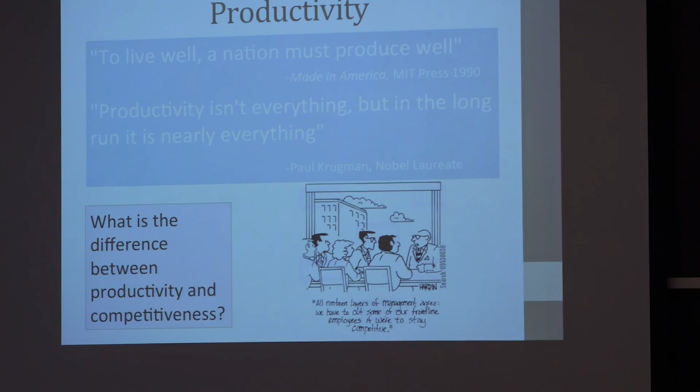So Brian talked about glasses yesterday. Anybody have any questions on that? This was my last slide two days ago, and I kind of brought up this question of what's the difference between productivity and competitiveness. I think I said something about this earlier in the term, but anybody remember what the difference is between productivity and competitiveness?

Basically, productivity is how efficiently can you make something, and competitiveness is what can you sell it for. If I want to give you a sound bite of these things: productivity is how efficient is your process, your people, everything that goes into the manufacturing operation. Competitiveness is all these other nebulous things like the exchange rate between currency, which has nothing to do with manufacturing. That's determined on some geopolitical level, right?

So I was at a meeting once, I was on the review committee for the National Institute of Standards and Technology in their manufacturing area. The first guy in the morning gets up and says, NIST is the Department of Commerce's competitiveness laboratory. He gives this talk, and at the end I ask a question, I say, don't you mean you're their productivity laboratory? Oh no, we're the competitiveness laboratory. I said, so you're dealing with exchange rates? Well, no.

I mean, competitiveness is, do you have slave labor? There's lots of places in the world where we still have slave labor. Whether we call them slaves or whether they're treated like slaves, that's all part of competitiveness. Productivity has to do with how efficient is your manufacturing facility.

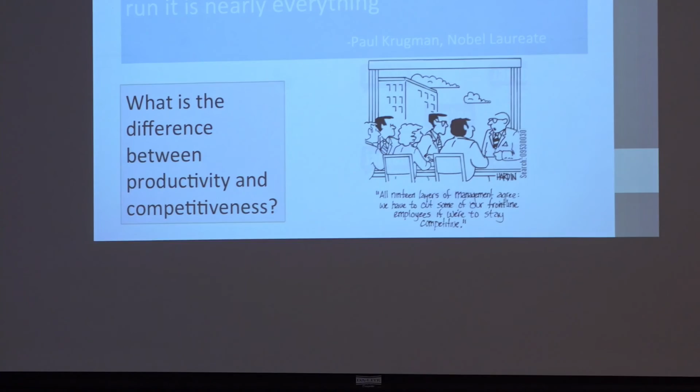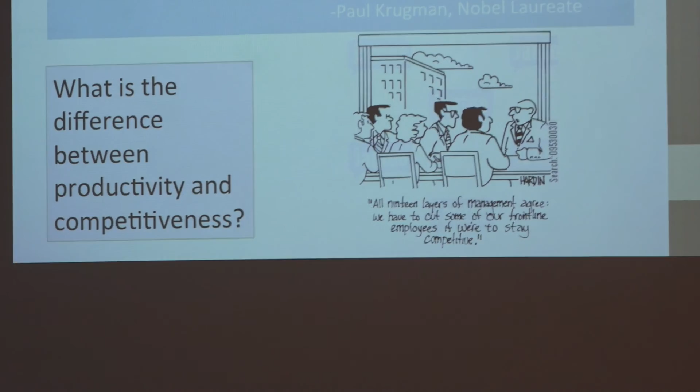And of course, this is a story about how management always thinks that they're the key to productivity. If we have time, I'll tell you this story I heard from a vice president of Pratt & Whitney sometime about manufacturing management during World War II.

But anyway, today I wanted to talk about steel mini mills as a case study of how you can tremendously increase productivity. We kind of walked through and said, well, people were making wrought iron and cast iron 400 years ago. It was a person-year per ton, okay, and that's dropped down to 20 minutes per ton as the person labor input to making steel today.

Some of that was continuous casting, Henry Bessemer melting steel, BOFs and things like that. But another part of this that's been driving it is the steel mini mills. The steel mini mills came about in the mid-1970s because they were actually Canadians, but a couple of people, well, one of them wasn't. The guy who founded Nucor, Ken Iverson, was not a Canadian, he was just a businessman.

But a few people learned that scrap could be had and had been hovering for 30 years around $100 a ton for steel scrap. I mean, it might get down to $90 or up to $120, but it's hovering around $100 a ton. And if you remember, I mentioned the blast furnace hot metal cast iron cost was $180 a ton. They're sort of fungible raw materials, whether you use steel scrap that comes back through recycling, or you take virgin ore and put it through the blast furnace to make cast iron. You can put either one into the steel refining furnaces if you have the right type of furnace, but this one was basically half the cost.

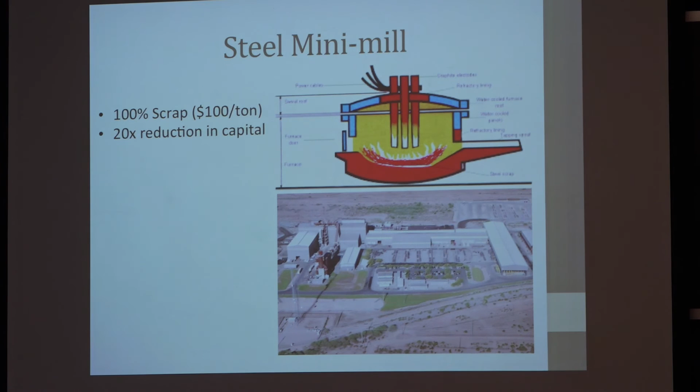Half the cost on something that's 25% of your overall cost in a $500 billion industry could be a lot of money, okay? So these people realized it, and they realized that the only thing that could take 100% scrap was the electric arc furnace. These things have been around since the 1880s, ever since Westinghouse and Edison gave us easy available commercial electricity.

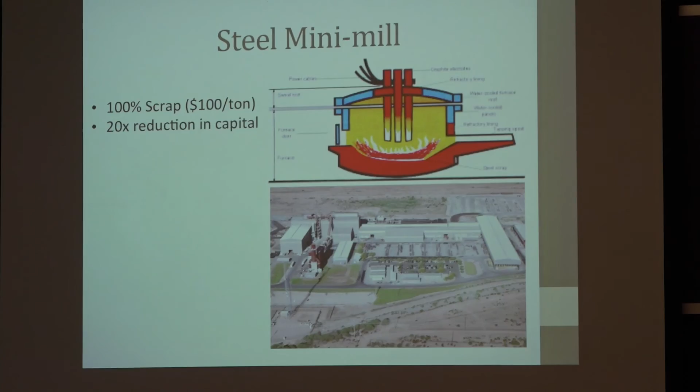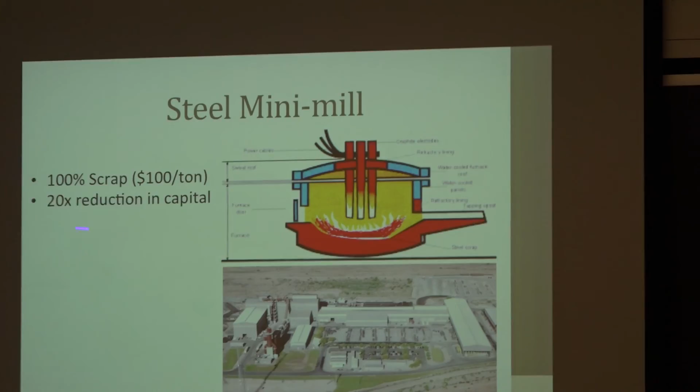They also knew that a couple of these people had worked for big steel companies, and they knew the culture there was to do things the way they'd done it 80 years ago, just wasting money and things like that. So they looked at electric arc furnaces where instead of 300 tons of steel at a time, you could melt 40 or 50 tons at a time, and it might take about 2 hours to melt it when they started, but you'd end up with steel.

And if you used the right type of scrap, that's all you had to do. You didn't have to do all this other refining and other stuff. There were some disadvantages, but they started out saying, we're just going to make rebar, the cheapest value grade of steel. Just a steel bar, doesn't have to have particular impact properties, toughness properties. It's basically a very simple type of material, steel material.

And the big companies, they laughed at them. They said, you guys can't produce more than a couple 100,000 tons of steel a year in your plant, and you're selling the lowest quality stuff. Well, this is the whole story of the innovator's dilemma, which is Clayton Christensen's book at Harvard Business School, about your competition kind of taking a big company and nipping at their toes, the bottom of the product line. The big company's trying to come up with new, fancy, better, high-tech, higher value-added product, and these guys are going after the lowest quality stuff, okay?

But they could do it with a 20-fold reduction in capital. Today, an integrated steel mill would cost you $20 billion, we noted. You can build a mini mill, and if you remember the picture of the Burns Harbor, Indiana plant of Bethlehem Steel, that was stretched for miles, okay? And this is a mini mill, stretches for yards, okay? And that's a 20-fold reduction in capital. And over here is going to be the electric furnace melt shop, whereas this wouldn't be 25% of the melt shop at a big integrated steel mill.

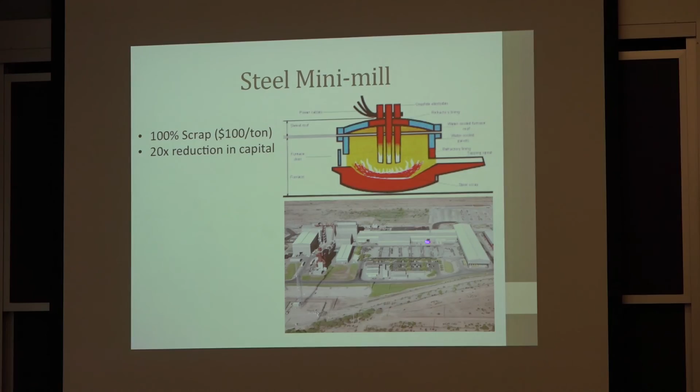And the rolling mills, well, they're only making one kind of product. They're not an integrated mill that's trying to make 100 different products. They're going to focus on one product to begin with. And they don't care. They're just going to take a small piece of the business. And the big guys laughed at them and thought those guys will never go anywhere. That was mid-70s. I was working for an integrated steel producer, and I remember all the jokes that people were making about the mini mills and how they'd never go anywhere.

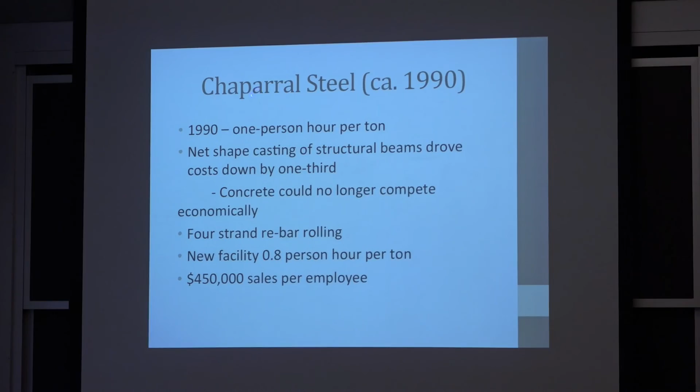Well, it turns out today, about half the steel in the United States is made by mini mills. And it's not just the low-end stuff. They just kept on getting better and better and better. So that's part of the story I want to tell you. And I'm going to take an example of Chaparral Steel. Chaparral's original plant was in Midlothian, Texas, started by a Canadian who's a graduate of this department. They started in the mid-70s, but I'm going to tell you some stories about the 1990s. And they started out with the rebar business.

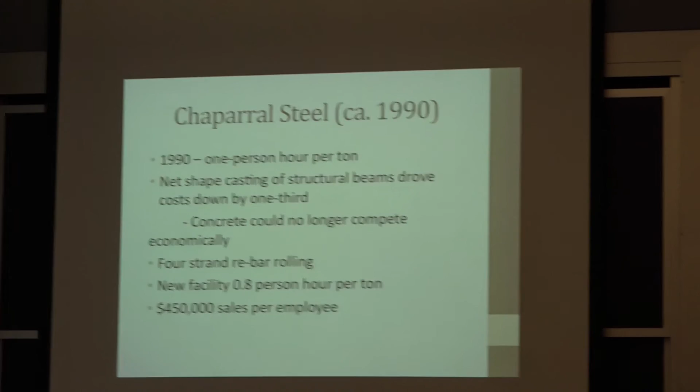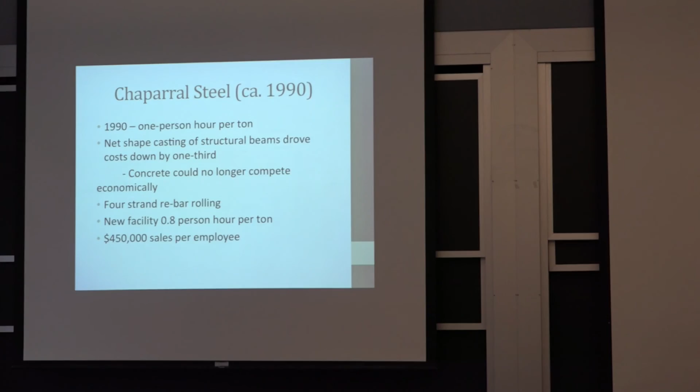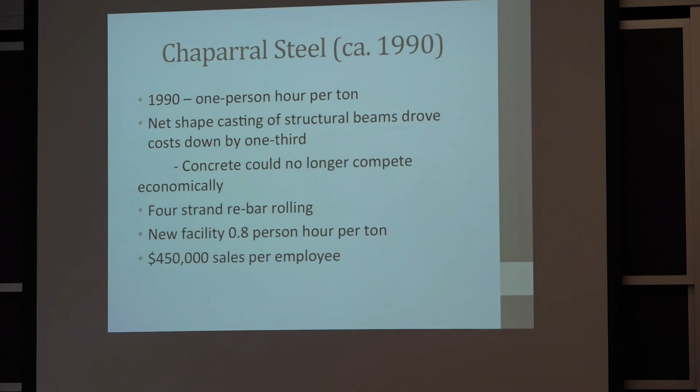I used to go around the country and look at parking garages and say, oh, that one was built about 1980 because it's steel, that one's built in 1970 because it was concrete. That was just the change in economics of this type of technology.

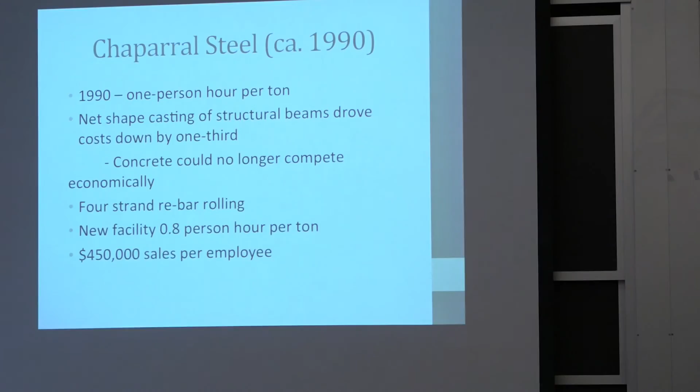Another thing they did was four-strand rebar rolling, which was their earlier product.

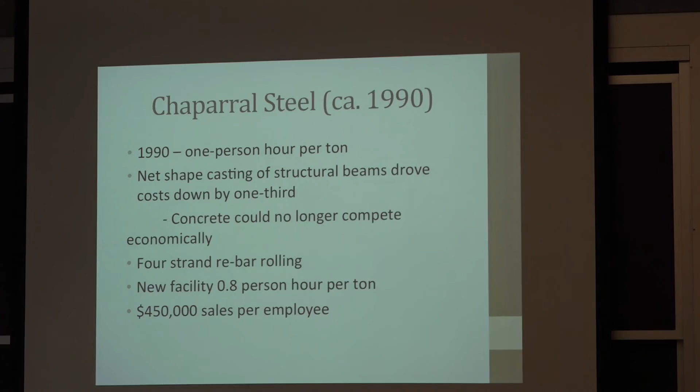One of the interesting things at Chaparral is that they're not an employee-owned company, but they have profit sharing. One of the requirements at Chaparral is that production people were required to spend one week a year going out with the salespeople and meeting the customers. What a novel idea in 1975 or 1980 to actually have your operations people meet the customers.

I remember one guy that I met who had worked for CF&I, which is Colorado Fuel and Iron or something. In Pueblo, Colorado, they had an integrated steel plant.

Oh no, he worked for Armco Steel in Houston all his life. I was talking to him once, and I asked him, have you ever done any benchmarking about other steel companies and how they do things? He said no, the only other steel plant in his entire 30-year career that he had ever been through was the CF&I plant in Pueblo, Colorado, and he was on vacation, and he passed the steel plant.

He decided he had some time, stopped, went up to the gate and said, hey, I work at Armco Steel in Houston, can I see your plant? So he got a tour of someone else's steel plant. That was the management intelligence of the integrated steel producers, kind of 1980 or 1985.

You wouldn't dare tell anybody about what you're doing because your technology is the best in the world. Your technology is crap, okay? There are other people who have good ideas too. But no, they could never believe something like that.

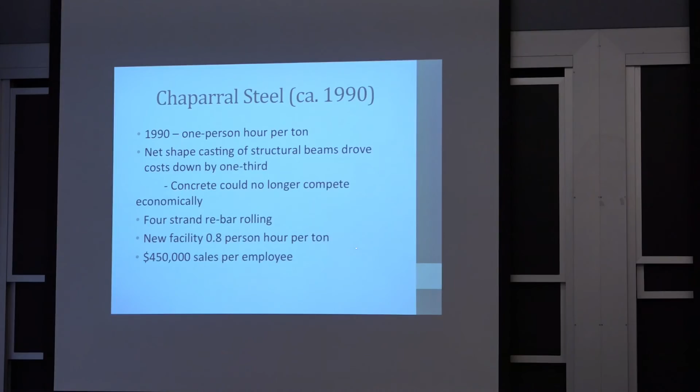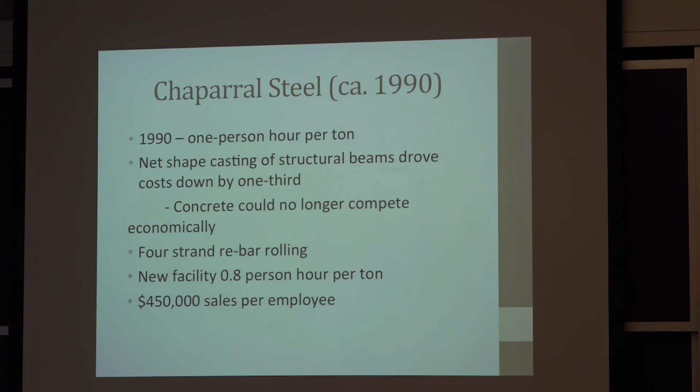So with 4-strand rebar rolling, they built a new facility at 0.8 person hours per ton. This is around 1990, which was kind of world class. Gordon Forward used to say, when we started Chaparral Steel, it cost $30 a ton for the Japanese to ship steel across the Pacific to the United States. That's just the cost of shipping. If we could make steel for less than $30 a ton labor, there's no way they can compete with us. That was their goal, to get down to lower labor costs than the shipping costs into this country, because we're the market, or at least back then we were the market for the world. We still are, but not in steel anymore.

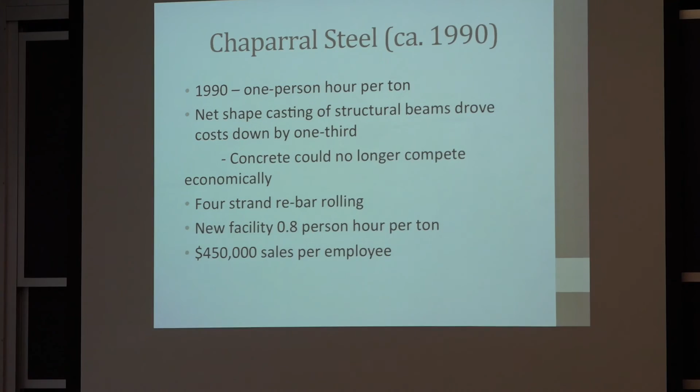They had $450,000 sales per year per employee. And what did that mean? Back in 1990, I kind of developed a rule of thumb that I had come up with by looking at some big companies' sales and dividing by the number of employees, and you'd always end up with something around $100,000 per employee. You could hire an engineer back in 1990 for $40,000 or $45,000. You could hire an hourly worker for $25,000. You had to have $100,000 of sales, because your product costs you something, in order to employ people.

Well, Chaparral had 4.5 times that. Now, this $100,000 - I'd look at a company and say, oh, they've only got $75,000 per employee, they don't have very good profitability. I'd look at another one, it might be $150,000.

Back in the mid-90s, I was going through the Boeing door plant where they make doors for aircraft. This is a very interesting business. Purely deterministic. It only takes 1 year to make a door.

Now, why should it take a year rather than 3 months? Well, it took them a year, okay? One of the reasons is you have to drill each hole for each rivet about 7 times. There's the original hole, rough hole, and then there's the pilot hole, and then there's the reaming hole, and I don't remember all the reasons, but it's like 7 times a guy with a hand drill is putting something through a hole, okay?

So when you walk through that door on that airplane, that was 20 years ago, so it's probably the $100,000 door today, okay? But that includes even the little doors that you jump out the window, you know. It also includes the big cargo doors, so there's a variation here. But the door you walk through is about a $100,000 door today, okay? So that's one way to estimate things. But Chaparral had a much better than average sales per employee.

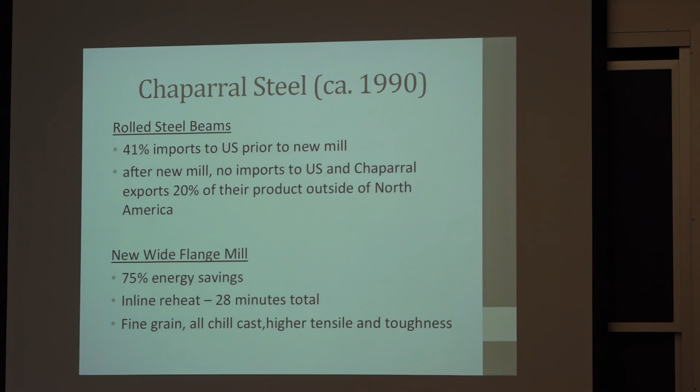The other thing about Chaparral, the rolled steel beams, they took that net-shaped casting and they basically put them in their rolling mills. Before they started doing this, 41% of the rolled beams were imported from Japan or Romania or wherever. After they built their new mill, there were no more imports of structural beams of their sizes, and they were exporting 20% outside of North America.

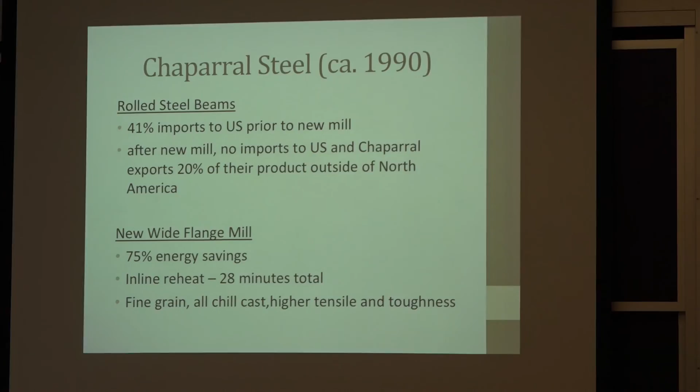So you got to remember, this is 1990, when everyone thought that American steel was a dead industry. They had lost their productivity. No, their productivity was still better than anyone else in the world when you have people actually thinking about how to innovate. I mean, you go into a dog bone shape as opposed to a rectangle. That's not that big an innovation. It's an incremental change.

But the big integrated producers, so I'll tell you another story. I only worked for Bethlehem Steel for 20 months. But after about a year, I was working on higher toughness steels and stuff, and I had come up with a process change that would make better quality steel. No cost, just a simple little process change, different way you do it in the plant. And I explained it to my boss, who was an MIT PhD from this department, okay?

And he argued with me for a while. He says, why do we want to do this? I said, well, Jim, we make better quality steel, and it doesn't cost us anything. Well, I finally convinced him, and we went up to the next level manager, who was a PhD from Lehigh University, and he canned it. He says, well, it won't help us sell any more steel.

And that was their mindset. All they wanted to know is how to sell another 1 million tons of steel. They could care less about selling better quality steel. And you want to know why they're bankrupt? Because they didn't care about better quality, okay? That was their mindset.

Anyway, so the new mill had 75% energy savings. They changed this. You saw how everything cooled down there after the dog bone shapes cooled down, and they had to reheat those to bring them up to the rolling temperature. Well, some of these guys in the mill said, oh, it's red hot, or mostly red hot, when it comes out of the continuous caster. Why don't we just go directly to the rolling mill? Or put it through a reheater then without letting it get down to room temperature?

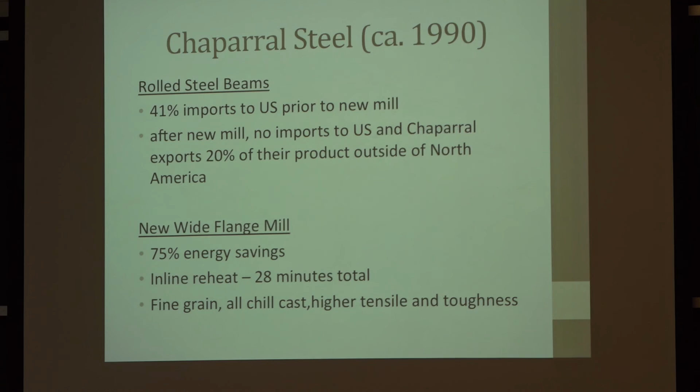Because before they would cast them, cut them, store them out in the yard for a week or two, because you want to have a big inventory in case something broke down and you could keep your other mill rolling. Anyway, they decided we're going to do inline reheating, and they could go from casting to finished product in 28 minutes without storing things in the yard, less inventory and everything.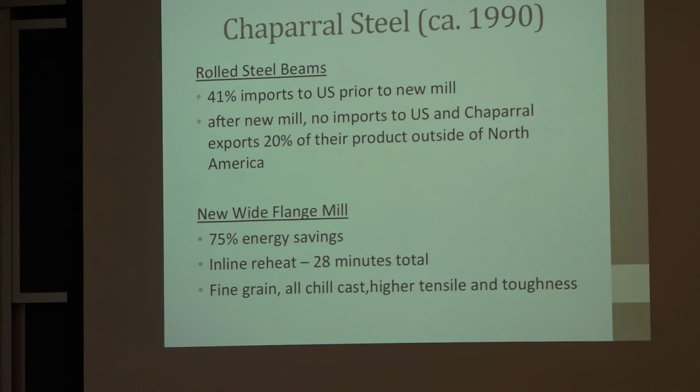They ended up, when they did all this with the net-shaped casting, the better one that looked more like an I-beam, getting very fine grain, all chill cast structure in the casting, and higher tensile strength and toughness. And the interesting thing in the structural steel business is it used to sell 36 KSI steel and 50 KSI steel. And you get a premium for the 50 KSI steel because you had to put a little alloying element and other stuff in it.

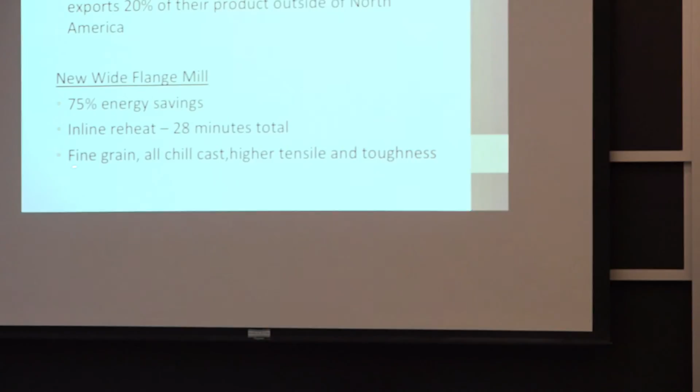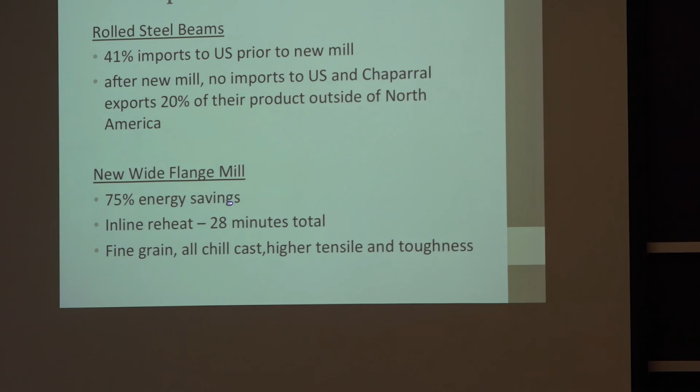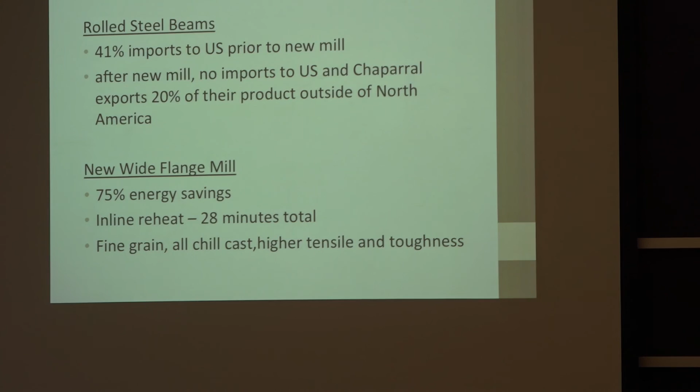But in fact, Chaparral, by going to net-shaped casting and inline reheating, and I forgot, I should have had data in here somewhere in my notes. They went 75% energy savings, but they went from like 28 passes through the mill to 11, okay? Because you're near net shape. Tremendous savings, and it turns out what came out had enough strength for 50 KSI.

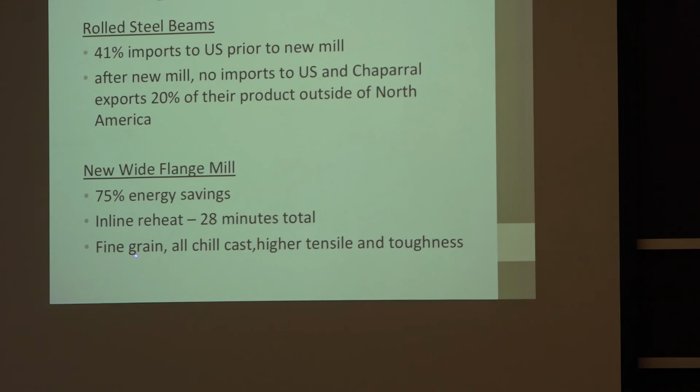It had plenty of toughness because it was fine grain, and all of a sudden they could sell for the same price 36 KSI or 50 KSI, and that's exactly what they did. They produced one product. You order 50 KSI, we'll ship you this. You order 36 KSI, we'll ship you the same thing. It just exceeds your requirements, and no one's complaining about that, okay?

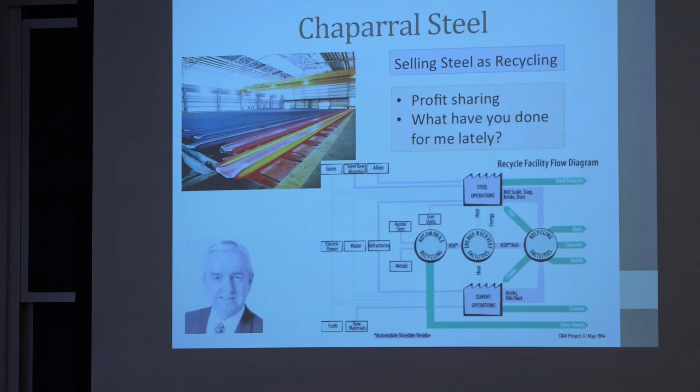Here's a picture of Gordon Forward, okay? From Vancouver, Canada originally, but now retired in Southern California. This is a new mill they built in Virginia, and you can see coming off their caster the rolled beams coming off. They started selling steel. Gordon started selling this as recycling. Gordon won some award from Tom Peters, who was a management guru, as the #1 manager in the United States back in the early 90s, okay?

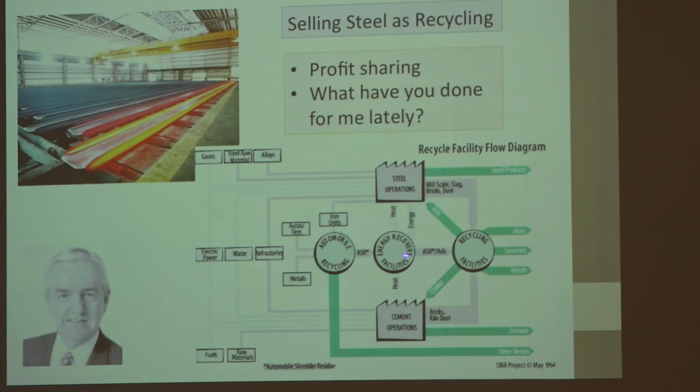And this is a little plot they had. Chaparral had both the steel operations and they had the cement operations, and they had an automobile recycling plant. So their scrap was old automobiles, and they could shred them, and you can shred an automobile in like 60 seconds, okay? Now, before you shred it, you have to take certain things out. You got to take the lead battery out, because the lead battery, you don't want that in the steel.

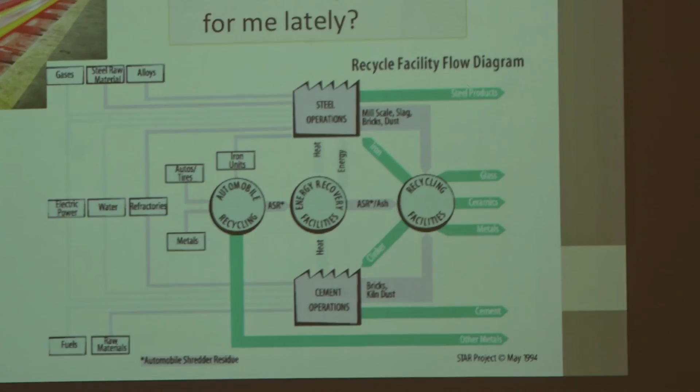You got to take the seats out, because the foam cushions, you don't want to start putting that into the steel mill. In fact, that's the biggest problem. If you go to Chaparral, you see a big mountain of old foam cushions from automobiles.

And the other thing is the guys at the recycling plant that were ripping these things out, they didn't make a lot of money on their hourly wage, but they collected the quarters people had dropped under the seat for 20 years, or for 5 years. And those guys, Gordon said, were getting about $300 a day in change. Okay, and he had a wheelbarrow to carry out the change. Anyway,

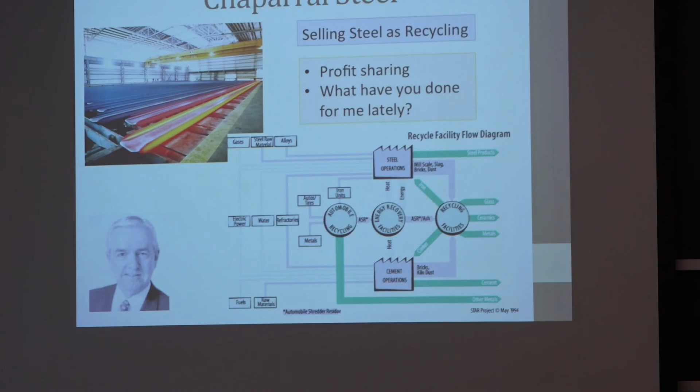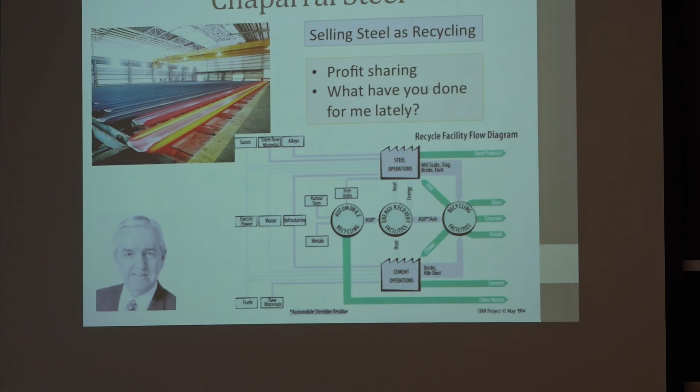They had a cement operation, because one of their philosophies, they put it in Midlothian, Texas, right outside of Dallas, because Texas was building lots of highways. They were going to pave Texas with rebar and cement, okay? Well, it turns out they take the old foam and they'd use it to fire the kiln in the cement plant. That's how they got rid of the foam. So they're recycling that.

Motorola would pay them 10 cents a gallon to take the wastewater from their semiconductor manufacturing plant where they had arsenic. It wasn't high levels of arsenic, but they used it to mix into their cement because there's already arsenic in cement at higher levels. So no one could tell that there was an increase in arsenic in the cement when you already have higher levels in the natural stone you're dealing with. And they got paid for the water they were using, okay?

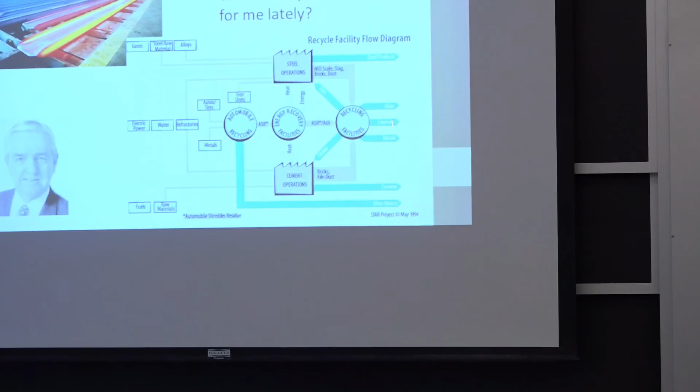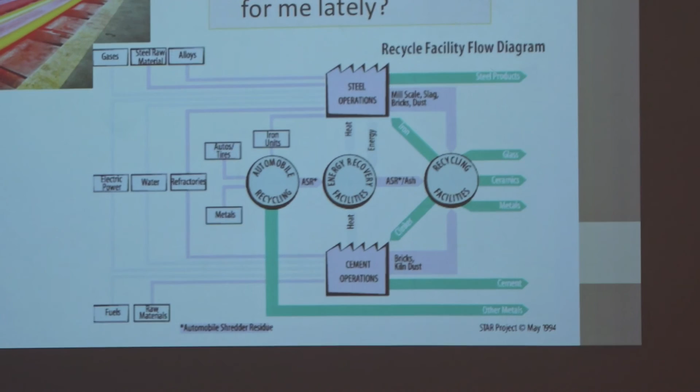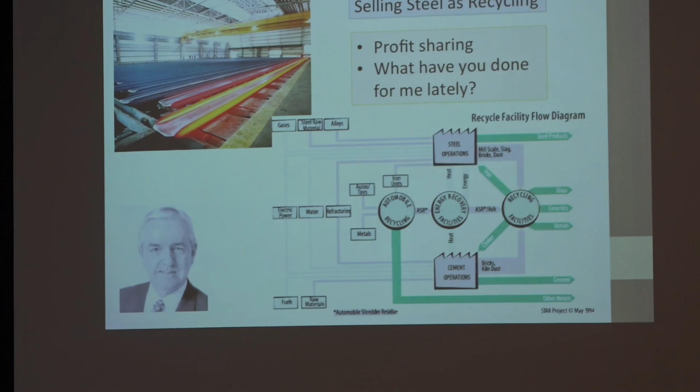So they would take the steel and it'd go to the steel plant. They'd take the foam, it would go to fire the cement operations. Anyway, they call it energy recovery facilities, but this was Chaparral's recycling project. This is 1994 on here. Gordon told me the story once about, they were always looking for a new way. Well, I'll tell you that story in a second. So they were selling steel as recycling because politically that was good for the public. They wanted people to know that this was not a dirty old steel plant. This was a recycling plant that improved things.

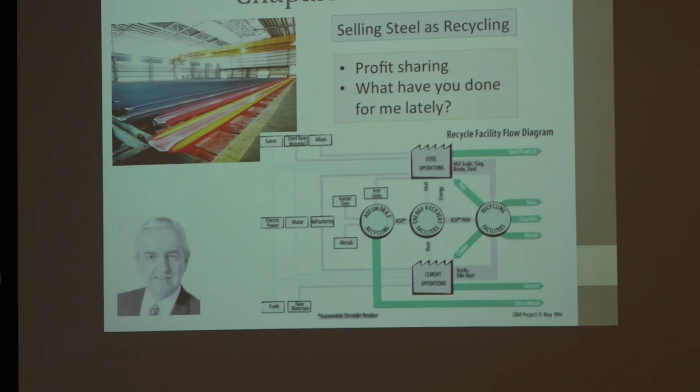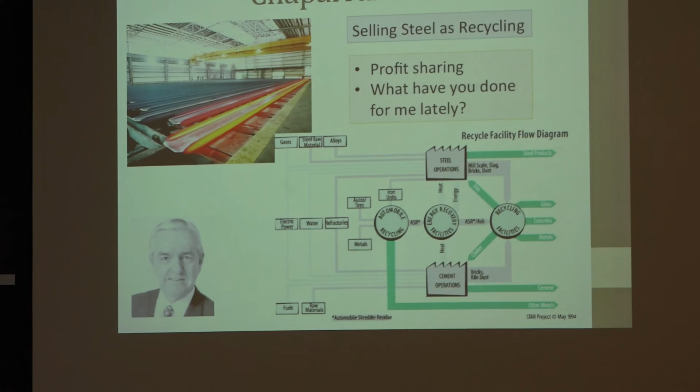But one time when they were firing the cement operations with the fluff, some people found out about this and they wanted to know, well, what pollutants are you putting into the atmosphere from your cement kiln? And they had all the data. They knew what was going up the stack in terms of CO and other impurities. And they're trying to figure out how to explain this to the people in Midlothian, to the city council that wants to regulate them. So they're sitting around the table trying to figure out how to explain that they weren't really the great evil Satan company.

One secretary comes in to bring them their lunch or something, and here's part of the conversation. She says, well, is this anything like the exhaust from the automobile? And they started thinking about it, and they explained that the pollutants they were putting into the air were equivalent to 2 cars driving past the plant per hour. Well, once you learn to explain it in terms the public could understand, no problem. Oh, we got lots of cars driving past that plant. 2 more is not going to hurt the environment.

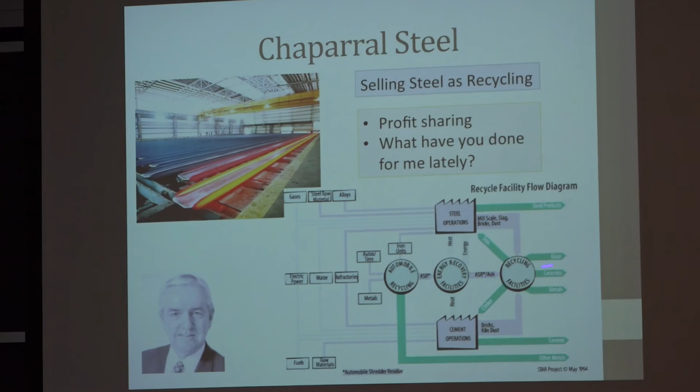So Gordon used to go around the country, and he loved to give talks. It's sort of one of his things. He liked to be in the limelight, and he was a great speaker, or he probably still is a great speaker, except he's probably 90 years old. Anyway, he became chairman of Chaparral Industries or whatever. But there were a couple of things that really motivated the people. One is they had profit sharing.

You walk through that plant, and every bulletin board had a picture of that week's profits. They know how much they sold that week. They would post it, and every employee, every 6 months, would get a check, depending on how efficient they had been. And so people wanted to be efficient.

When they were thinking about some new piece of capital equipment, these guys weren't figuring out, like at Bethlehem Steel, what's the biggest Cadillac we can buy, and then you approve that budget. They were trying to think, can I get by with a Yugo? Or can I buy a used Chevrolet to do the same thing? Because they knew part of that was their money, okay? So they took personal interest in it.

Now it turns out I was part of a study group as part of the LFM project a number of years ago, back in the early 90s, on Chaparral. And Steve Wheelwright, who was professor at Harvard Business School at the time, and I were assigned Chaparral Steel. And so we went down and spent a couple of days at Chaparral with Gordon, and there were a couple of things that came out of that. The first day, we were supposed to be doing a study on how they would run projects.

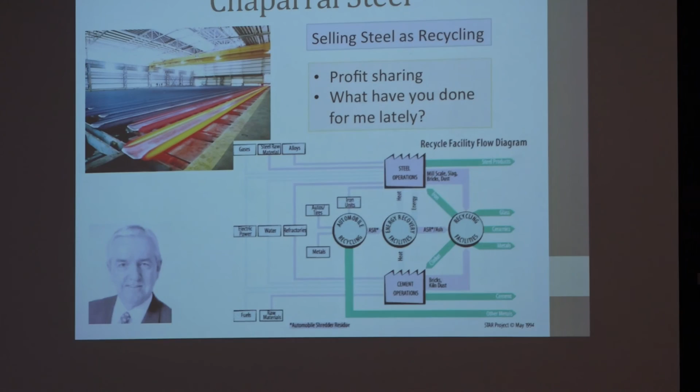right? And that night, I realized that the culture that Gordon Forward and others had started at Chaparral was not who's going to get blamed if this project fails. It was what you got blamed for is, what have you done for me lately? If you hadn't tried to do something new and different in the past year, you were downgraded. You would not get as good a raise.

They didn't care if your project failed because Gordon knew that not every project was going to be successful. What you got blamed for is if you didn't take some risk and try to do something differently during the past year. If you went a couple of years without trying to do something, you'd probably get fired at Chaparral. Completely different culture, a culture looking for innovation. So Chaparral had a number of things.

The other thing, so we went to the corporate dining room, and Gordon was very proud of his corporate dining room. At Bethlehem Steel, I told you we had one of the most expensive research laboratories in the country, built in the mid-60s, $600 million. It'd be billions and billions today to build this Homer Research Labs up on top of the mountain overlooking the Bethlehem Steel plant and Lehigh University. When Bethlehem went bankrupt, they basically gave it to Lehigh University, and so now it's a Lehigh University

facility. But they had a beautiful, beautiful cafeteria, and I would go up there sometimes to eat my lunch in the cafeteria, just overlooking from the top of the mountain, looking out over the veranda and stuff. But we passed the executive dining room. In the executive dining room, I saw strawberries in there as I walked past, the size of tennis balls, okay? I've never seen something. I mean, today, you actually see some of these things at Costco and stuff. But back then, my eyes bugged out to see this type of food that was in there. Of course, I never got to eat in there.

Let's talk a little about reinforced concrete, since we're discussing structural materials. Reinforced concrete is really a composite material, but when we talk about the billion-ton-per-year club, we've got stone and concrete, and the best concrete is reinforced. This is a modern reinforced concrete structure in Germany, a pretty fancy building, and here people are pouring the concrete onto the steel rebar.

You don't have to have steel rebar, but you can see on the tensile side of this beam, you've got the steel bars on the tensile side. You don't put them on the compression side because concrete's fine in compression. It's all fracture mechanics here, right—the Griffith equation and stuff.

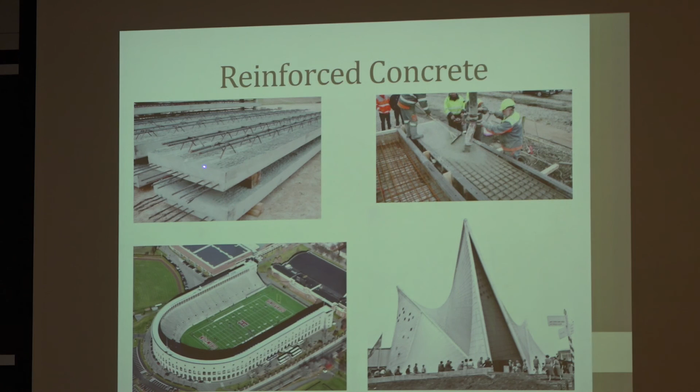It has to be about 5 or 10% cross-sectional area of steel compared to concrete, because steel is about 10 to 20 times stronger than concrete. Concrete typically, after 30 days after pouring, has about a 3,000 psi compressive strength. Steel's 30, 60,000—pick your number.

They also do fancy things like pre-tensioning these rods now, putting compression into the whole structure. As they're casting the concrete in a form like this, big hydraulic jacks put tension in the steel. When you cast the concrete and then relieve the jacks, the steel contracts and puts everything into compression, keeping the concrete in compression.

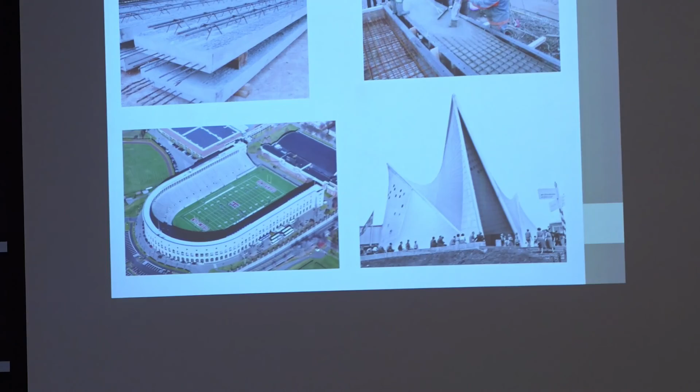Those are little tricks. This is the Harvard football stadium. Anybody know why it's here? In 1987, it was named a National Historic Landmark because it's one of the first major reinforced concrete structures in the United States—built around 1900. You can look it up on Google if you want. So, reinforced concrete.

4.2 billion tons a year is concrete. It's not all reinforced, but it's a very low-cost material, and people have learned to engineer with a very brittle material. I told you in the structural materials course that steel is a wonderful material because it's got toughness—most metals have some toughness. But we've got brittle concrete, which outsells on a tonnage basis all the metals in the world by a factor of 2.5 to 3. So we've learned to deal with brittle materials.

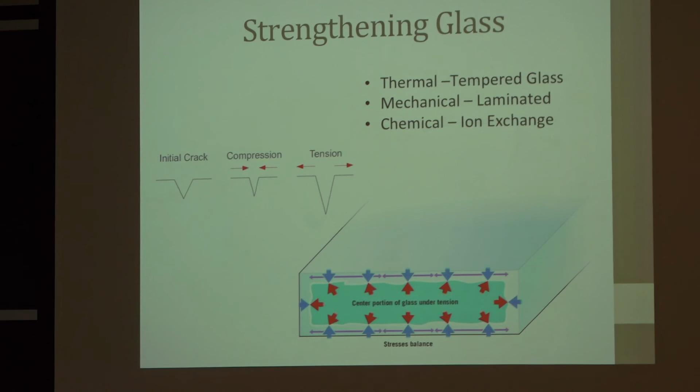Brian talked about crown glass, so I won't repeat that—he probably covered fiberglass manufacture, plate glass manufacture, float glass manufacture, and strengthening of glass. You've got thermal tempered glass, mechanical laminated glass, and chemical ion exchange. Someone wanted to do the Prudential building for their talk, which used chemical ion exchange, tying up about a year's capacity to make chemically tempered glass.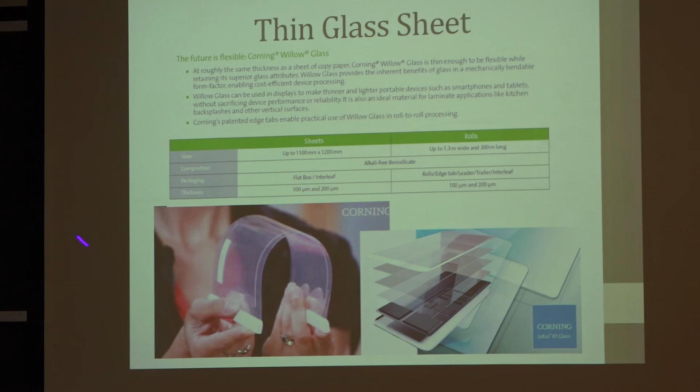We won't go through all that, but I did want to talk a little—did you even show them the willow glass? So, 2 years ago Corning came out with something called willow glass. Very thin glass sheet, 100 to 200 microns thick. You can buy it in 2 sizes: 4/1000ths of an inch, or slightly more than one human hair, or 8/1000ths of an inch thick.

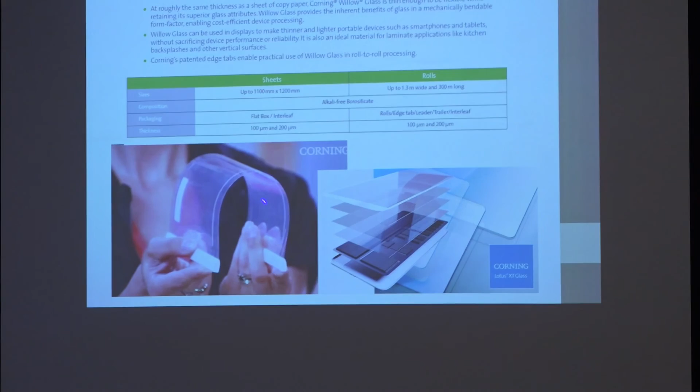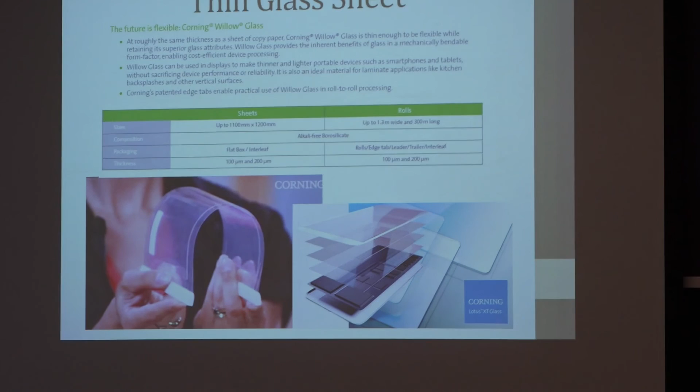You can obviously bend it, though I wouldn't try bending it in a compound curvature, in two directions. But it's extremely strong and scratch resistant—glass is scratch resistant anyway, you can't scratch it unless you've got a carbide or diamond tool. I can take a hard steel knife and I won't scratch that glass if I run it against that window glass.

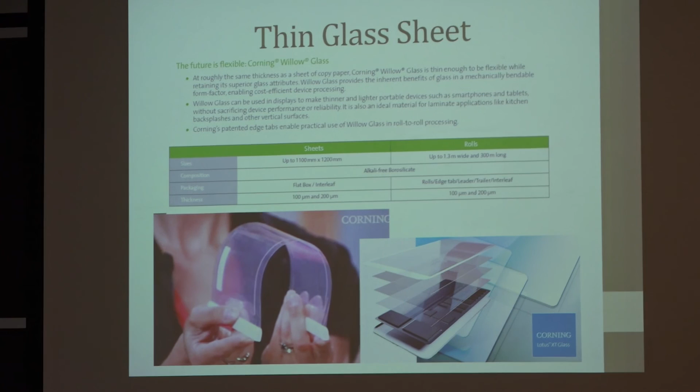Glass is significantly harder. But the problem, did you tell them about the problem of corrosion of glass? Okay. Most glass that we know of has a significant decrease in strength over time. This is duration of stress versus the bending stress. And glass starts out at 14,000, is that megapascals? I can't see it from this angle. PSI. 14,000 PSI. About as strong as aluminum, okay? Regular aluminum, not super aircraft grade.

And within 1 second, it drops down here. And within an hour, it drops down to 1/3 of the original value, a day, a week, and a month. It's down to 1,000 PSI, not as good as most plastics, okay?

Now, Bob Rose, my old thesis advisor, when he was teaching 3091 30 years ago, or 50 years ago, I don't know how long, had to be 40 years ago. He would stop at the Sylvania plant up here in Danvers. He lived up in Peabody. And he would pick up freshly made light bulbs from that morning. He'd come in and at the 11 o'clock lecture in 3091, he would take the glass light bulb and he'd throw it against the wall and it would bounce. It wouldn't fracture. You wouldn't dare do that with a day-old light bulb.

What happens is when you first make the light bulb or form the glass, it's got a very smooth surface, no small flaws. And remember, the fracture mechanics of glass is such that a few, 100 micron flaw and all of a sudden you've lost 90% of your strength. Well, it turns out the problem is the sodium and potassium oxides in the glass are attacked by the humidity in the air.

So if I want to make something out of good fiberglass, I got to make my glass fibers and coat them with that plastic within an hour or two, or I'm going to lose most of the strength of those fibers. When those fibers first come out of the fiber machine, they're as strong as steel. They have no defects. But once the humidity attacks them, then I have little flaws, surface flaws, and fracture mechanics tells me I'm going to have lousy strength.

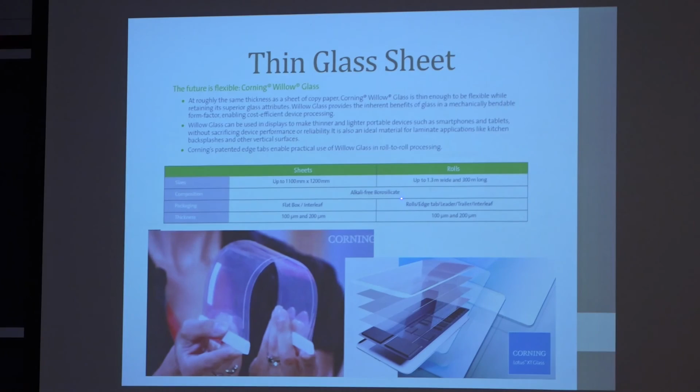So what did Corning do? Well, the first thing when I looked at this a few weeks ago, they use alkali-free borosilicate glasses. Alkali-free. No sodium oxide, no potassium oxide. They get rid of the corrosion problem. Okay? What else do they do? I will bet you money, because I know something about how Corning makes the flat panel display glasses for laptops and TV screens and cell phones and stuff. This is a cell phone thing, which they call, you can look it up. It'd be a good project, a presentation.

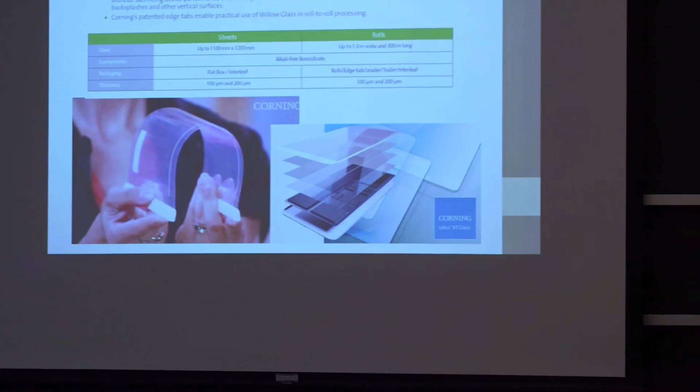I will bet you money this is at least 3 layers. Just like Corning ware, the cookware, it's 3 layers of glass. It's a laminated glass. Top layer and bottom layer like a peanut butter sandwich. The middle layer is going to be a different coefficient of expansion. When you pull these things off like a plate glass manufacturer, just rolls of these sheets of glass, put them together, 3 layers, you end up with, when you cool it down, compression on the surface and tension in the middle. So you can scratch it.

You can have moisture attack it, but it's in compression. And when you're in compression, that's what this is all about. If you have compression in your glass, you're going to be stronger, and the critical flaw size is going to be much larger. This is not the critical flaw size, but basically this is laminated glass where you keep the center in tension and the surface in compression.

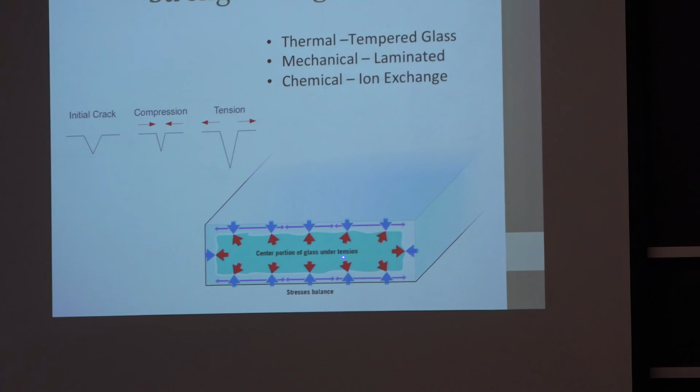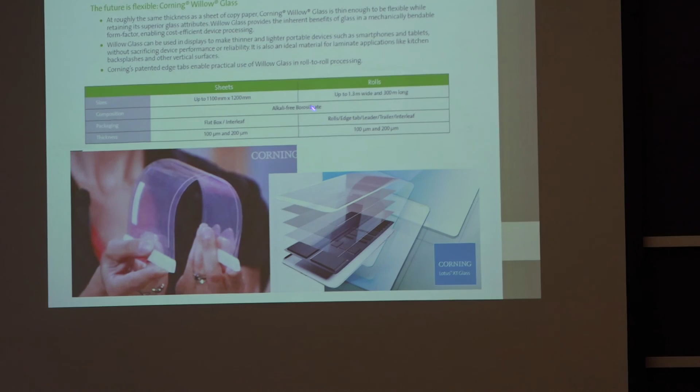I will bet you money, I don't know what willow glass is, other than willow glass tells me it's alkali-free. That means no sodium and potassium attack by moisture, and I will bet you that they have done the same thing they've been doing for 60 years in big thick pieces of Corning ware, cookware, where they laminate it and give you favorable compressive stresses.

And now, other processing technology which I know about for displays for the last 10 years, they have taken to the extreme of very thin, okay? And now, if you're going to have a backsplash in a kitchen, they paint the back of the glass, and now you have a hard surface, very thin. You just put it right up against the wall, and it's an architectural marvel, okay? So that's, okay, I've run over a little bit.